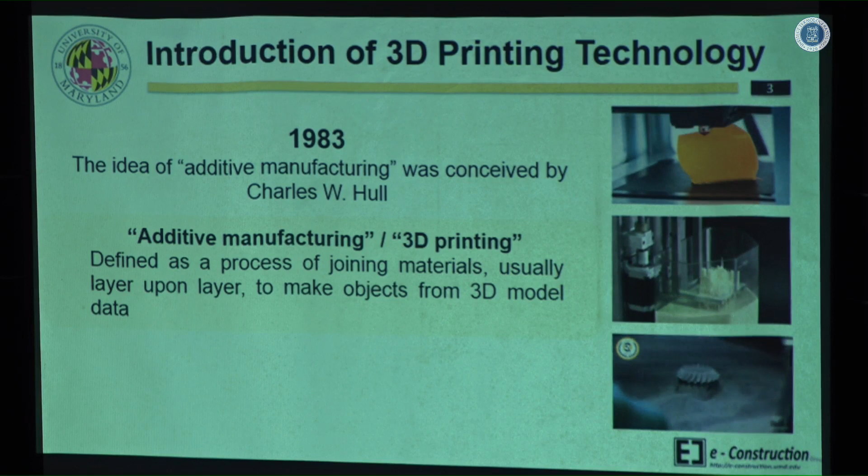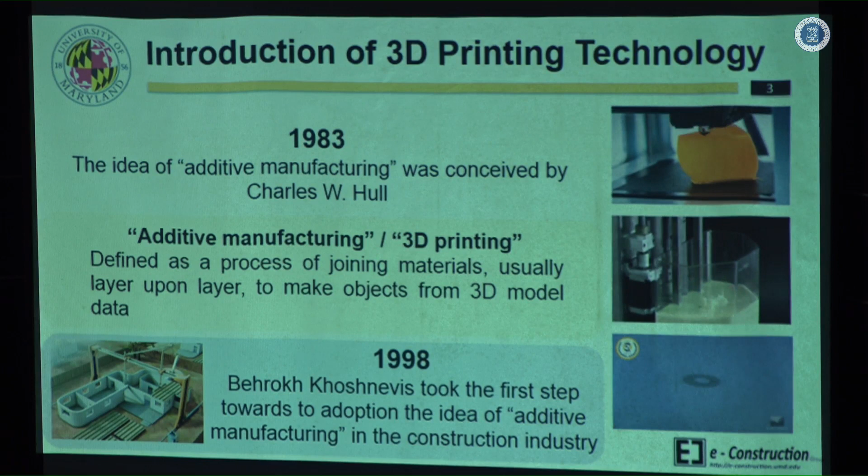So that's the definition. If we fast forward to 1998, a colleague of mine from University of Southern California, Professor Behrokh Khoshnevis, originally from Iran, started a new concept in construction called contour crafting. Contour crafting is the application of the idea of 3D printing to forming walls made of cementitious paste. He's credited widely with being the first pioneer of additive manufacturing in the construction industry.

These are some of the techniques being used for construction applications of 3D printing. One technique is powder-based, so it's not layer upon layer. It's really dispensing a pulverized material, typically bound together by some form of resin, either natural or artificial, usually engineered resin, that can generate any kind of shape the architect can possibly dream of. Fantastic, highly irregular shapes that would be almost impossible to form using conventional formwork if you wanted to do it in concrete. But the most popular techniques are not really powder-based for construction applications.

Most techniques are based on extrusion technology. If you're familiar with injection molding, which is really the most popular plastic product manufacturing technology anywhere in the world, it's almost an equivalent of it with some modifications, but with application to a cementitious paste. That cementitious paste, of course, needs to withstand significant forces, both vertical and horizontal, depending on the nature of the design.

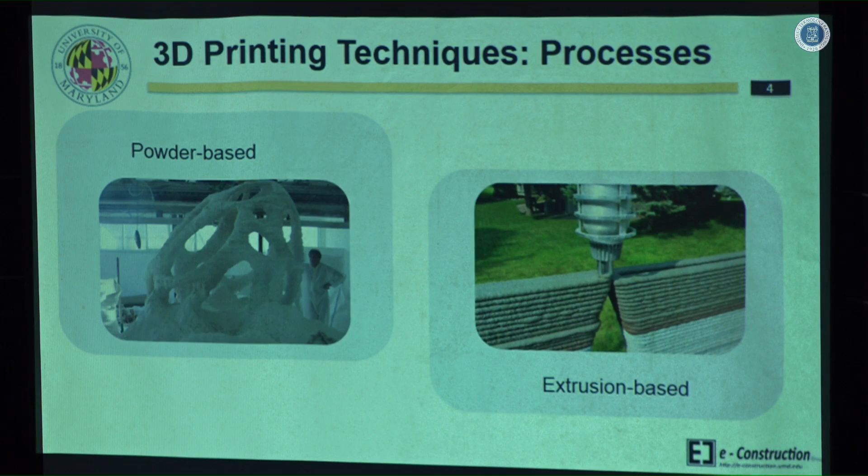But you can also classify 3D printing applications in construction based on the type of material being used. The one that's most popular is still cementitious paste - really cement mixed with sand and some sort of other aggregate, which could be natural or artificial. And of course reinforcement, either fiber or conventional reinforcement, is applied.

But you can also use other materials. University of Maryland's Materials Science Department has recently patented a product called liquid wood. It's really a sort of pudding type of material that you can fill into forms, and when it settles, it has the look, feel, and even mechanical behavior of wood. It could be engineered to look, feel, and even smell like oak, like pine, or even some exotic woods - exotic for us, but not for you - that are normally very expensive and difficult to attain.

For example, bamboo. Here it's a weed, and it's ubiquitous, pervasive. Whereas in the northern hemisphere, especially above the 60th degree latitude, it's not so common. However, this material has not been used for 3D printing just yet. There are some initial experiments to see whether it'll be applicable in constructing some non-load-bearing components, maybe furniture, maybe something else.

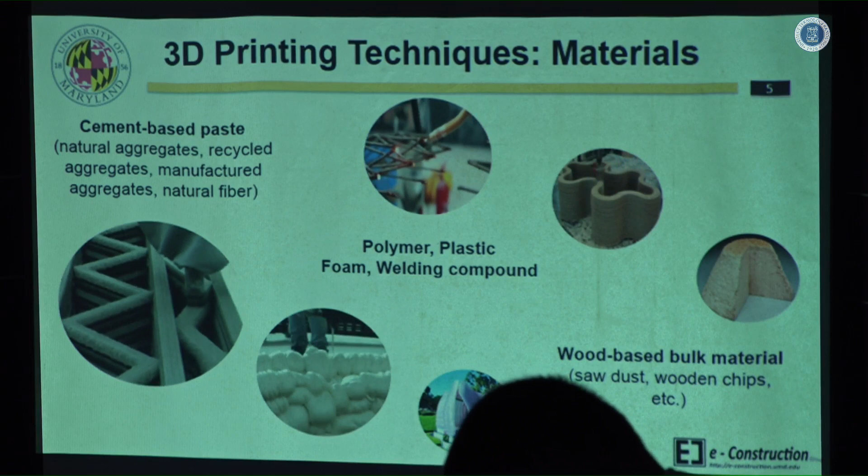Another way to classify this technology is by what kind of equipment is being used. The most popular equipment for 3D printing applications in building construction are gantry systems - gantries that can be set up and dismantled relatively quickly. They can carry significantly sized manipulator arms that can perform structural and non-structural assembly functions from overhead.

That's the technology used by Contour Crafting, the company started by Professor Khoshnevis in Los Angeles. He's actually on a 2-year leave of absence from USC, making sure that the company grows and delivers on contracts already signed with housing developers in the LA area. Another technology involves robotic arms placed on mobile platforms, either tracked locomotion or wheeled locomotion, and some of the most unusual applications even use legged locomotion for some of these.

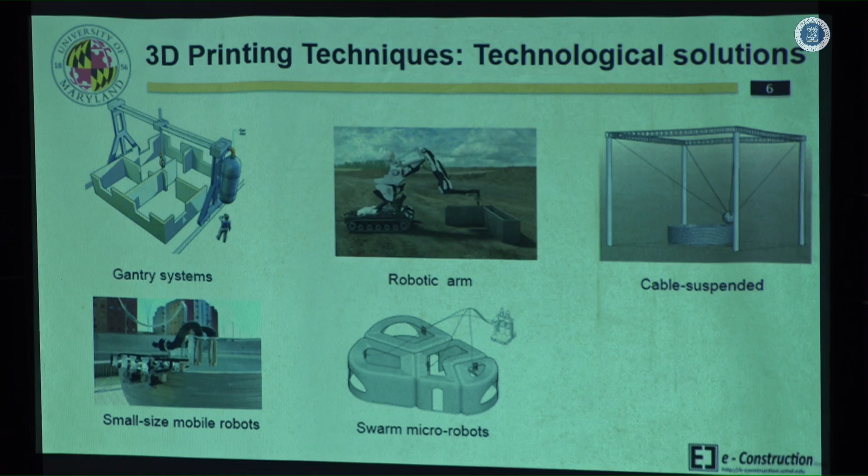So anyway, these are the various ways to classify 3D printing applications. Why am I saying all these things about robotics? Because 3D printing technology cannot really exist and be implemented in the construction industry without robots. Robotic technology is essential to the application of 3D printing in construction.

As for the size of objects these robotic devices can print, they're still relatively small, but there are some experiments, like Gramazio and Kohler at ETH in Switzerland. They can build retaining walls of very irregular shapes using traditional reinforcement mesh, or reinforcement can also be created from a welding compound by robots. I'll show you later how this is done.

So, 3D printing, 5 minutes left. That's it?

Okay. So maybe the time constraint can be relaxed because I have too much to say. Okay.

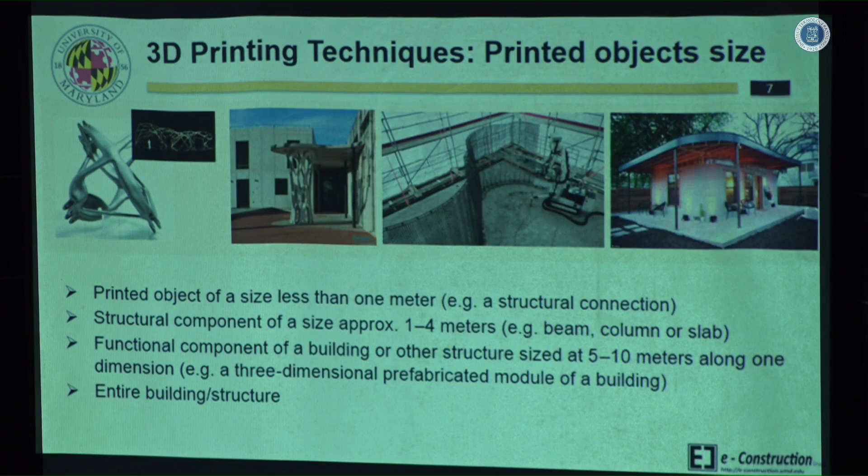So the other objects that can be constructed are ornamental columns like this using 3D printing, or small houses like this. These houses are still being developed on an experimental basis, but they are in fact quite a promise. Let me show you the next slide.

This is a project that was initiated in 2018 in Austin, Texas. Two graduates of University of Texas at Austin, one an architect and one a civil engineer, decided to produce this 3D printed home, very small, only 60 square meters, and it took them 47 hours actually to print these walls,

using cement-based paste and an overhead gantry that had suspended manipulators that were performing the 3D printing, and the entire structure was printed. The only thing that was not printed were these roof joists. They're actually wood, so the roof was actually placed on top of that.

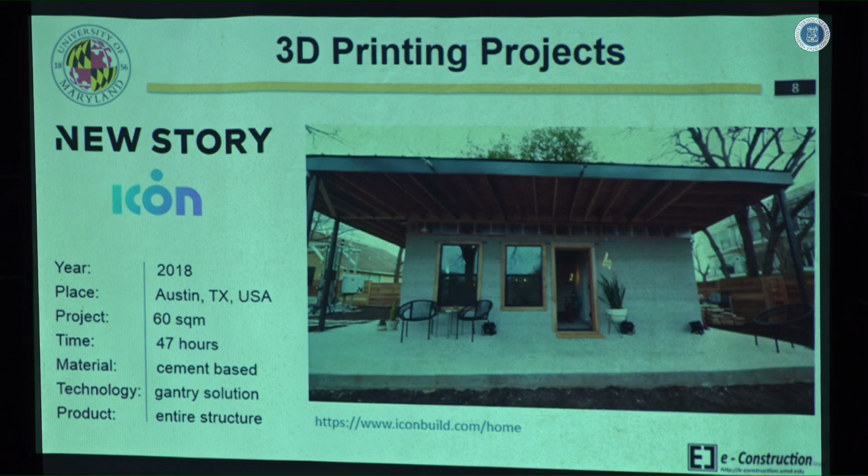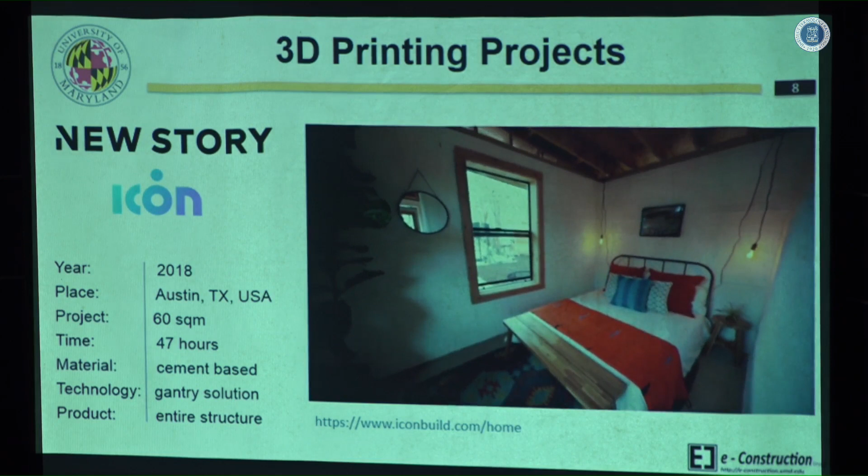But look at how this interior actually turned out to be. They left the walls using just raw concrete, and they decorated this little home. And this is just a showpiece for what this technology can do. It's on a construction exhibit in Austin, Texas.

The company name that's doing this is Icon Build. You can go to this website and see for yourself what other products they're interested in. And so this is just one example.

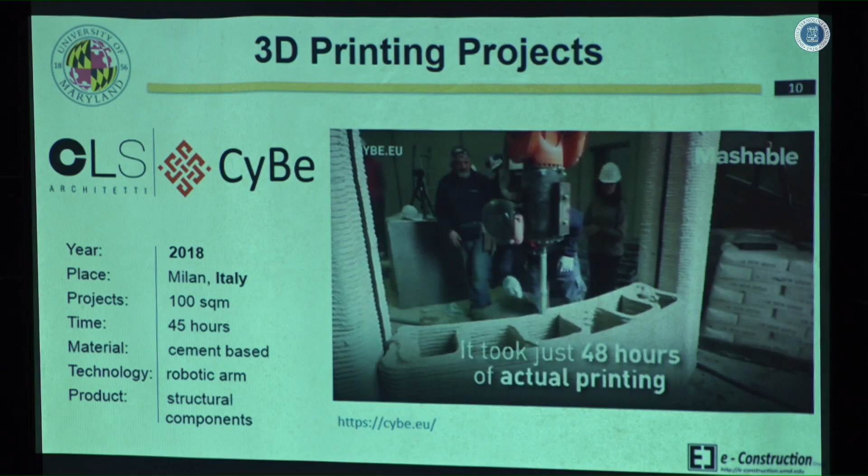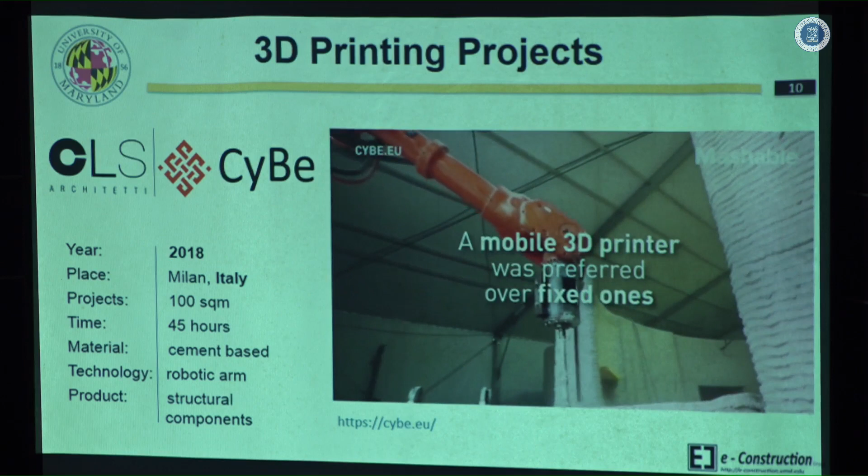And the reason is that because this is a larger product, 100 square meters, applying a gantry system to produce the whole house would have been feasible. Nevertheless, they wanted to do it faster. That's why they decided to put it in pieces. And a robotic manipulator was used from a mobile robotic platform.

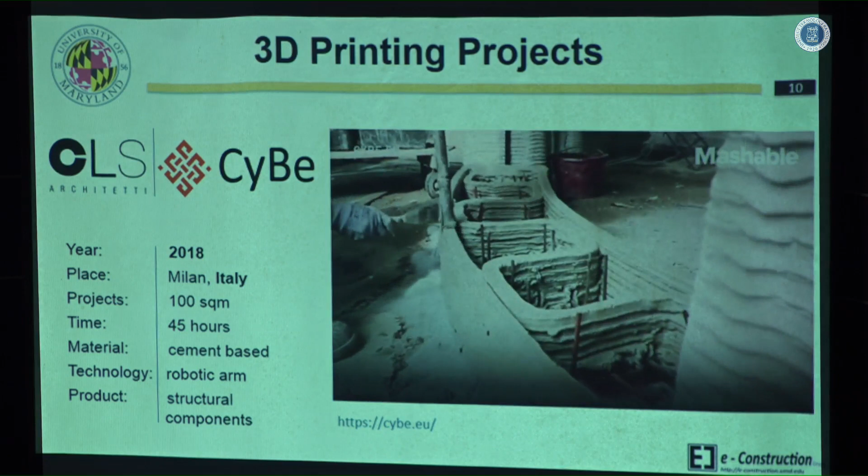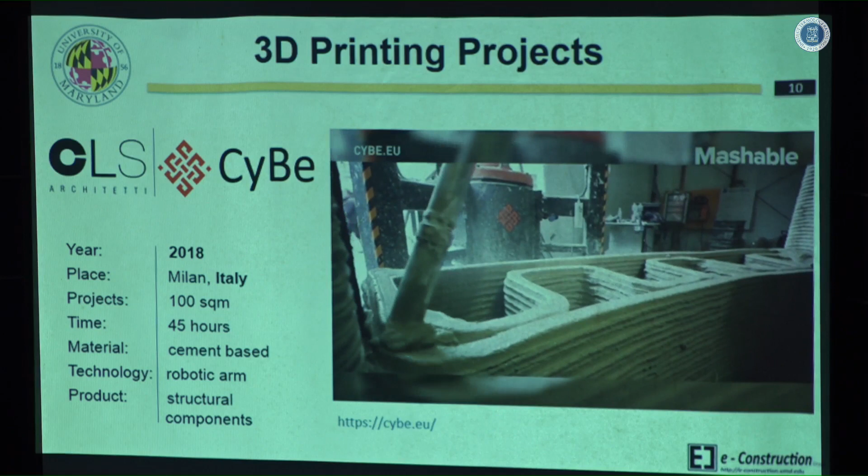Now, even some furniture, so there is a manufacturer in Italy that is printing bathtubs of fantastic shapes that are difficult to attain with conventional technologies. You can also print tables, and you can print other permanent fixtures in the building, so that is also quite possible.

Yet another company, and this was only less than a year ago, like 6 months ago, in Poland, an experiment to build just a single room, very small, 7 square meters, cement-based material, and it was a gantry robot that produced that. The idea is to be able to print 3D modules for volumetric construction, and to be able to assemble them, either stack them up or put them one next to the other for various configurations. There is quite a bit of promise in relation to 3D printing in modular construction.

And some of the components in those modules are actually 3D printed. Not the load-bearing components. Nevertheless, some decorative components are being included in there.

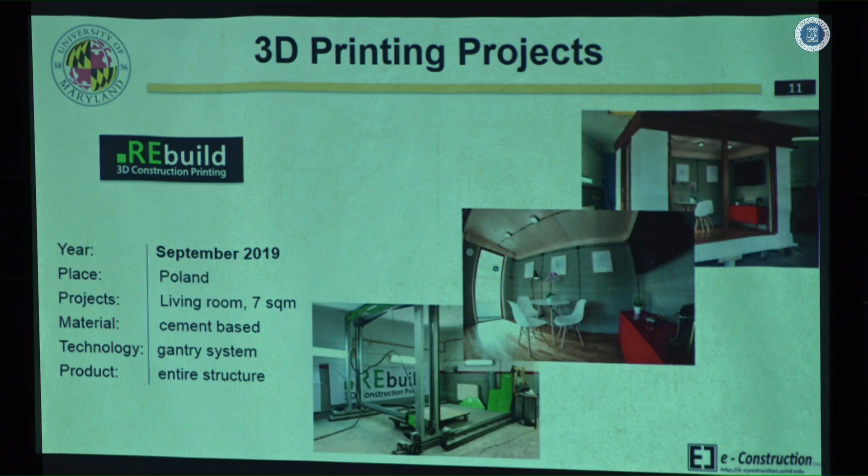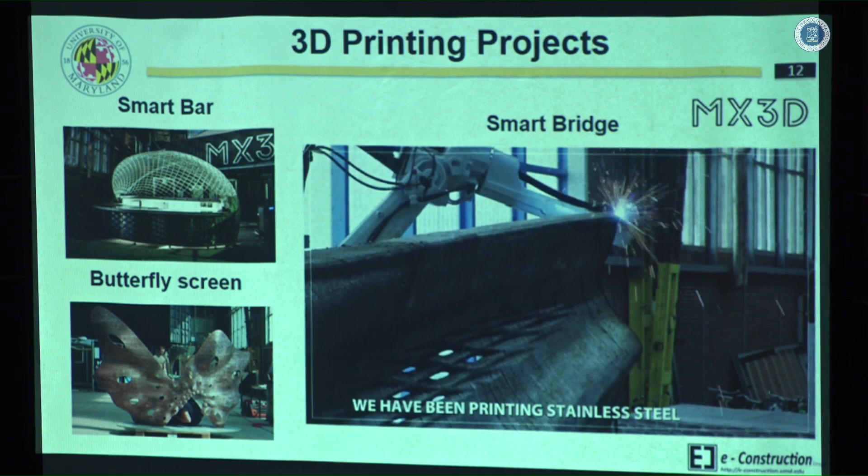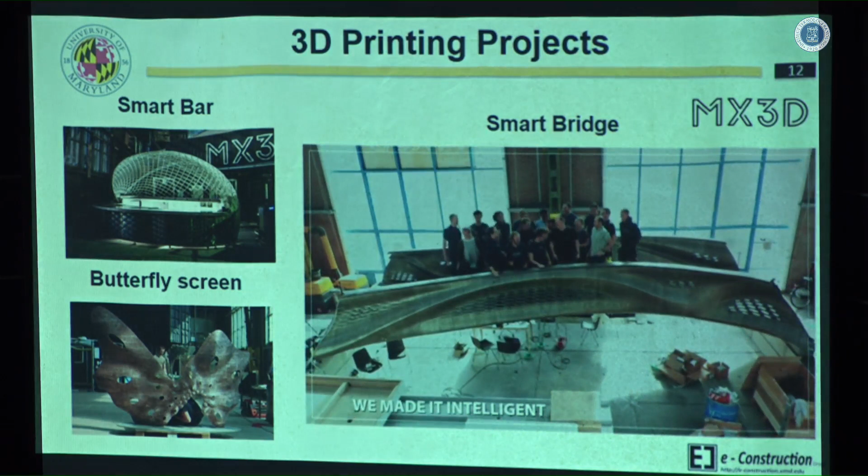This is a company out of the Netherlands that is printing a steel bridge, a pedestrian bridge, using pulverized steel material. So this project was under experimental stages. You could see the load test of people jumping on it.

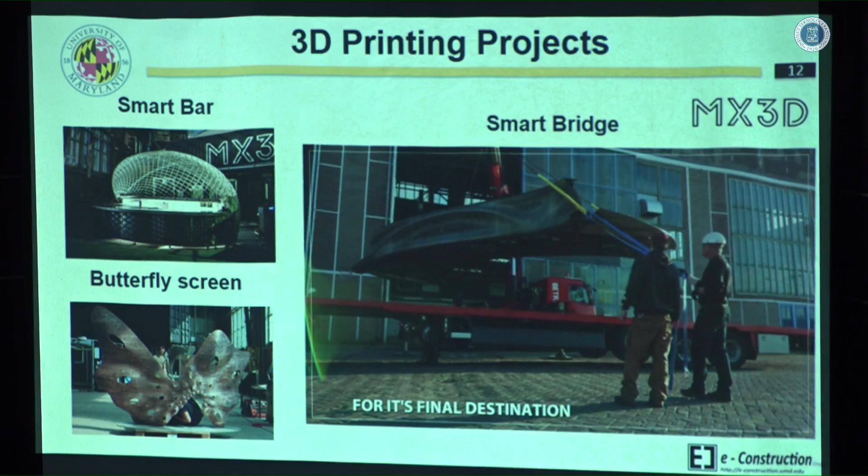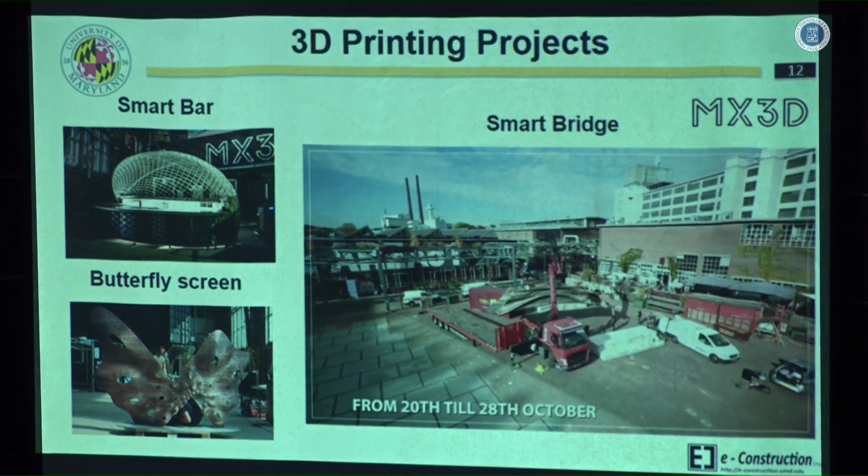This is now not the first. In fact, there are 7 or 8 such bridges throughout the Netherlands, and there are others. So you see the components being transported directly to the installation site. These are relatively small bridges.

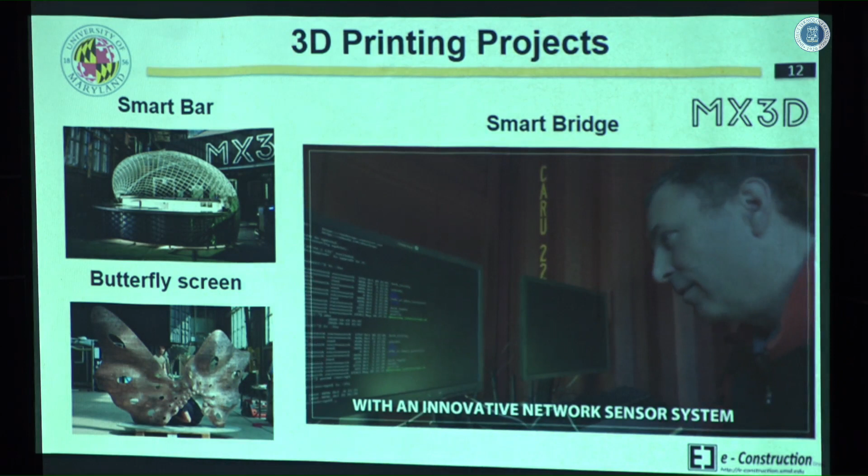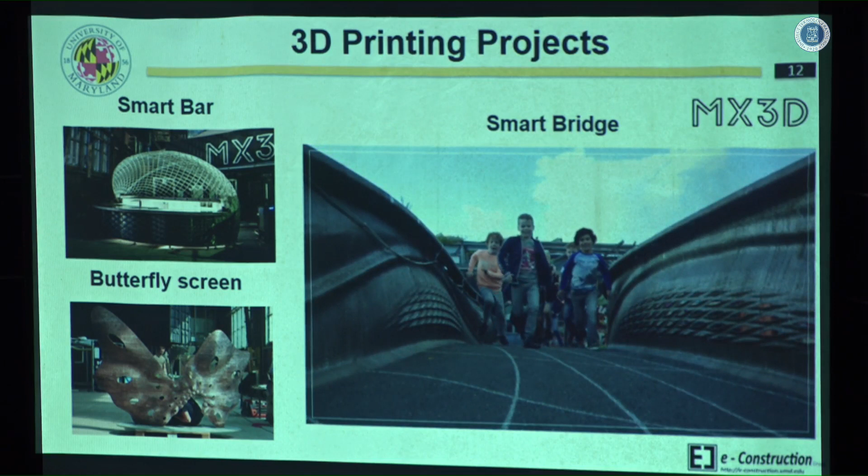Last October, I participated in a conference on 3D printing and construction, which was in the city of Tianjin in China. Just outside of the city of Tianjin is Hebei University of Technology. During the conference, they installed a 28-meter span bridge for pedestrian use on the campus of that university. And it was produced in segments in the university laboratory and delivered directly to the installation site on the project site.

So China is actually a big proponent and a big practitioner of 3D printing and construction. There are several companies that are turning out products very quickly, and in fact already contracting with major government organizations in China and throughout the world.

The municipal government of Dubai in the United Arab Emirates has ordered about 300 modular bus stations. It's not a bus station, it's a bus stop, but fully air conditioned, with all the installation inside, a luxury bus stop where you sit down. And the reason is that if you're in Dubai or in Abu Dhabi in the summer, the temperature can be above 50 degrees Celsius. Nobody would want to stand and wait for a bus under those scorching heat conditions. So this is a market that they're trying to exploit.

During the lunch break, I was talking with some of you about what's happening in Singapore at the National University of Singapore. In July of 2018 they had a workshop on application of cementitious paste to construction 3D printing, and they produced a design and a prototype of an outdoor toilet for rural areas in India, where sanitation is a huge public health problem.

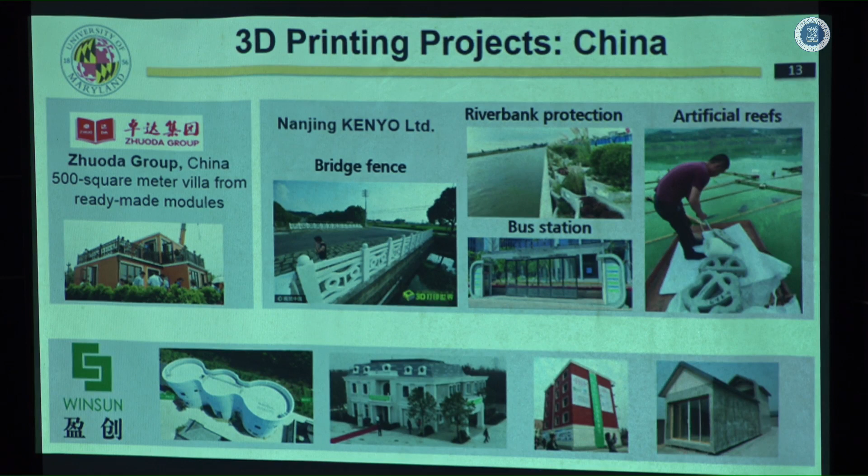Other interesting applications include artificial reefs, and you wonder what this is for. There is a lot of soil erosion and erosion of beaches in various countries, and the marine life is suffering as a result. So being able to actually mass produce these artificial reefs and dump them off the coasts of major tourist areas may actually help restore some of that marine life. But also, there is a strong interest in these artificial reefs from those establishments that are engaged in industrial production of fish and various seafoods that are being sent to the mass market for consumption. So all of that is of interest.

These are some ongoing projects in Russia. This company has made a name for itself, ApisCor. They're based in Moscow, but they are designing small buildings for deployment in Arctic markets, where temperatures can be as low as -40 and sometimes -45 degrees. So almost impossible to do any real work outside under those temperatures.

And there is enough of an achievement in plasticizer technology that concrete actually can be printed in temperatures down to about -20 degrees. They haven't tried anything below -20 degrees, but using plasticizers going down to -20 is what they're experimenting with at this point. So there will be a lot of new research and development in relation to how do you place reinforcement steel in these 3D printed structures in order to be able to meet the code requirements as far as load-bearing capacity is concerned. This is still ongoing work.

I had another meeting with a Dutch company that's located in Singapore, that is doing this work in conjunction with two different universities in Singapore, that is trying to produce conventional reinforcement using 3D printing techniques at the same time as concrete material is being laid through the extrusion process.

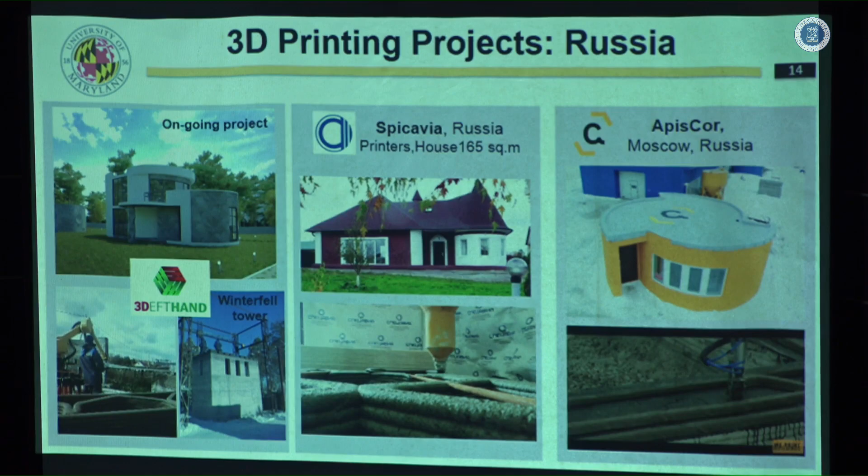Okay, what's driving the business is not just terrestrial construction, but also extraterrestrial. NASA in the United States has written out the competition for architects. There were prizes already awarded on how to design and construct a permanent settlement on the surface of the moon for about 200 people. And these people are going to stay there on a rotational basis for 3 months at a time. And it's not just men in their spacesuits. It's going to be families, husbands and wives, and even small children.

Imagine sending your family to the moon for 3 months. And where are your kids going to go to school? Where will you go out for a date, and where will you have your meal in the restaurant? So all these issues need to be addressed before any sort of permanent settlement can be established.

But some of the winners include architects from major architectural design consulting firms in the US. So this is not just child's play, it's not just university research. It's already gradually but surely moving into the industrial realm. The reason why 3D printing is very attractive for extraterrestrial construction is that there is really no other way to build anything outside of the Earth.

And also, if you want to build something on the moon, it has to be done with native materials. So if you want to use concrete on the moon, you'd better develop concrete that doesn't require any water, because there is no water on the moon. So there are actually 3 competing designs of concrete mix that doesn't require any water. So those are already available, so that's not an issue.

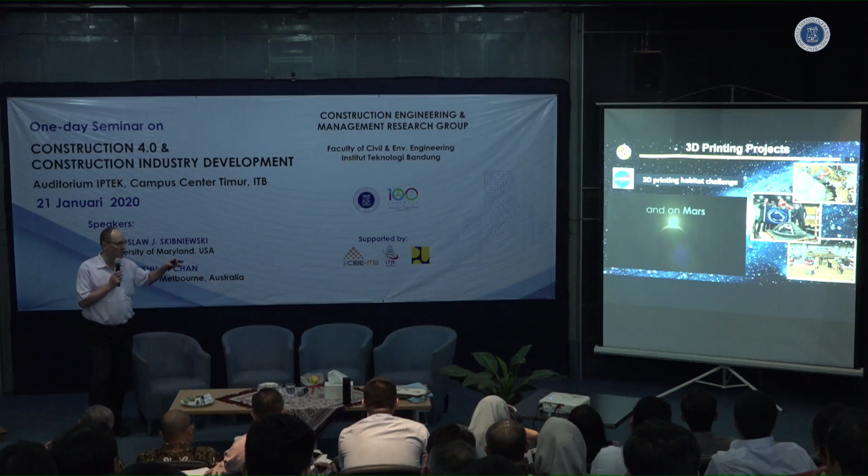All right, so these are some of the winning designs of how these lunar permanent settlements are supposed to look like. So it's not yet finished. In fact, many of these technologies that are being developed for lunar applications, or maybe ultimately even for Mars settlement, are most likely to find applications here on Earth, rather than being applied on Moon or

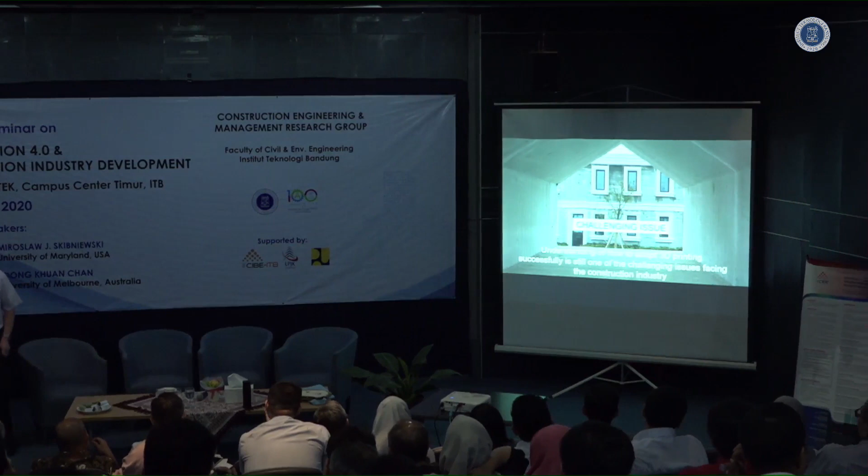on Mars. So, switching gears, we have looked at the various technologies available. We have done a lot of research on what's really applicable, what's realistic in terms of what we can apply today. And we want to see how successful these 3D printing technologies can be in today's construction market. How successful they can be within the framework of course Construction 4.0 that relies heavily on sensing technology, on big data, on processing a lot of data and information, and on robotic technology as a core automation technology.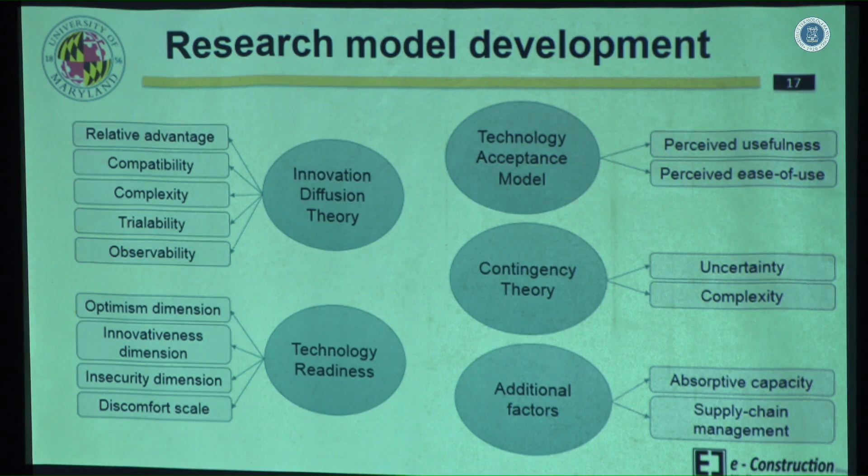So some of these factors are listed here based on the theories, but we wanted to see how applicable these theories are with respect to 3D printing. And so in terms of 3D printing, out of these 5 theories, and actually even more than 5, we came up with this list of 9 different factors that really matter as to whether this technology will be successful or not. So relative advantage over other techniques is one of them. Complexity of this technology, how complex or how easy it is to use.

Trialability, can we try it on a smaller project, see if it works, and can we scale up to a larger implementation? Compatibility is hugely important in construction because we have these traditional construction systems. We call them legacy systems. How well can 3D printing work with existing systems, and can it complement the existing systems, or you'd have to abandon everything and start implementing this technology from scratch.

Absorptive capacity is another term that is used by these technology diffusion theories. In our case, that simply means that the 3D printing technology is very likely to absorb the need for more robotization, so more application of robotics technologies in the construction industry, and also material science achievements. Currently, if you look at the funding picture in research and development of 3D printing for construction, about 80% of the funding goes into materials, research and materials testing.

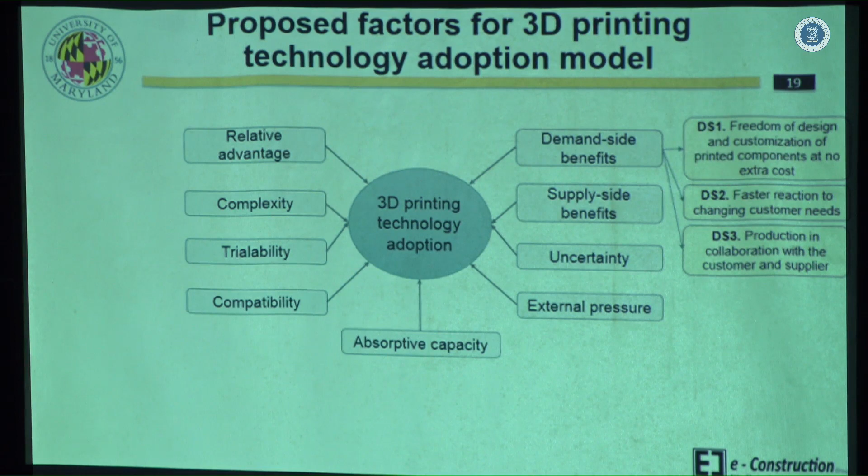All right, so this is our initial model that we came up with at the University of Maryland, and we're now in the process of coding that model into a decision support system. And so if I get another invitation from Professor Abdu, maybe for the next symposium, I'm going to present on the prototype of the decision support system for 3D printing applications in construction. I think I should stop here and see if there are any questions, and we can discuss some more on the issues that are of particular interest to you.

So, I would like to introduce you. I think you already met him, right? Yes, of course, the contractor. Yeah, already trying to implement the 3D printing. And also Ibu Dewi. Ibu Dewi is our pioneer here at ITP to implement BIM for ITP. Yeah. Excellent. Very nice to meet you. I would like also to invite Pak Haji. Pak Haji will provoke you all to discuss. Pak Haji. Ya, thank you Pak Abdu.